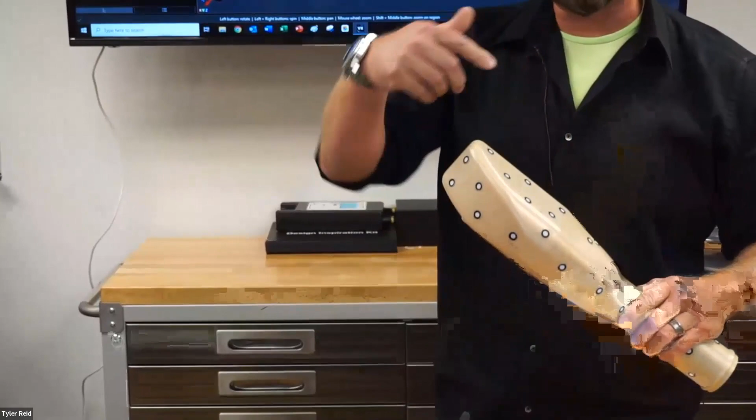I already have it plugged in, and I've already run a quick calibration. So let me show you a little bit about the scanning process. First of all, because this scanner is not hard mounted with an XYZ axis, it needs to know where it is in space. And that's done by putting targets on the part that you're going to 3D scan. So for instance, if my part is large enough, I might just put targets on the part. And that will allow me to scan the part.

And as you can see, the part can move. The part does not have to stay static, does not have to be hard mounted, because everything is moving together. So it can be a really great option for scanning things out in the field, scanning larger items that you can't get back to a clean room and hard mount. Now, let's say I'm going to scan something that is smaller and I want to do something more precise.

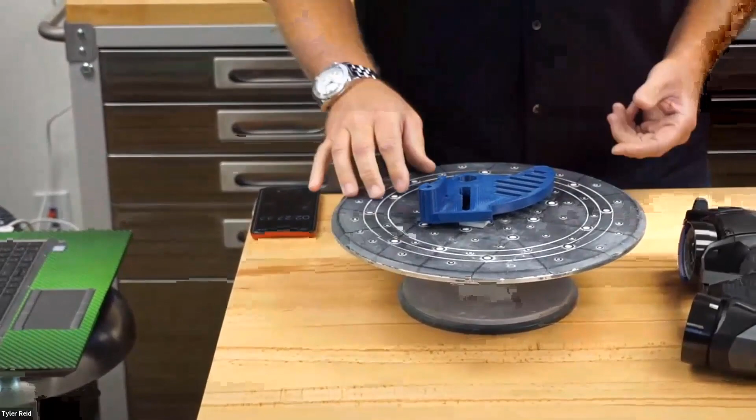What I have here is a turntable that's already pre-targeted. I have a little, we call it a shark fin. It's actually a disc brake guard for a motorcycle. I'm just going to set it here, and I've got targets in the background. I'm going to do the same thing.

I go to scan, and as I'm scanning, you can see on the screen behind me, or maybe live on the part, there's actually an 11 laser cross-section that's going over the part, and every time those lasers go over the part, the cameras see that. It's able to pick up that data very quickly, very precisely.

Now, I've got a lot of extra stuff in the scan that I don't necessarily need. Well, we have the ability to do things like add a clipping plane. So I can come in very quickly, select a few targets here on my screen, and it immediately gives me a plane that I can select and say, okay, yeah, let's delete that. So now all of that background data is deleted.

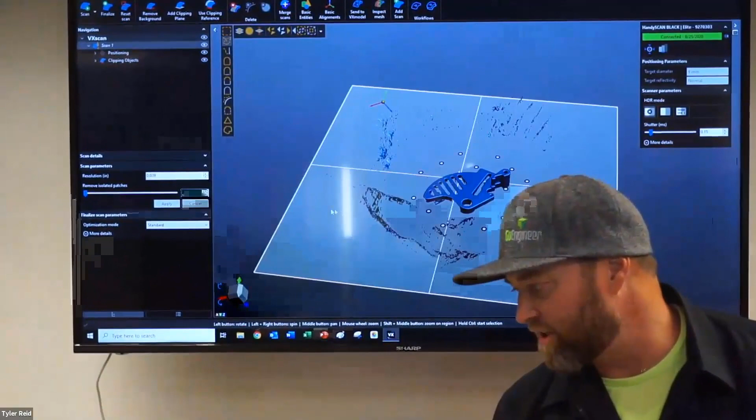I also have the ability to do things like grab the geometry of my part, and then quickly select everything else in the scan and delete that very quickly, which leaves me with just a clean version of my part.

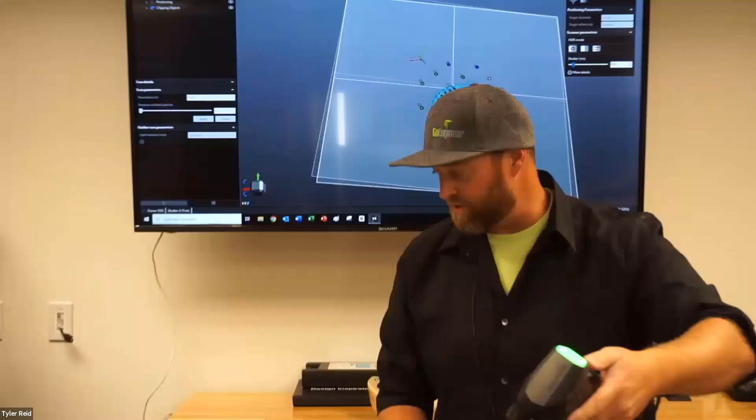If I want to go back to scan mode now and rescan and get a little bit more data, I can absolutely do that. I can zoom in right here from the handheld to get a little closer up and show detail. I can also switch to a single laser mode, which allows me to focus in on specific areas and get really precise detail down in a hole, down in a cavity, something like that. The single laser mode has a little bit better point of view.

Now, you might be asking, well, what about on the small part? How would I get the other side? Well, once I have the data I want from this side of the scan, I'm simply going to flip the part over. I'll come in here to my software and just tell it to add a scan.

And I don't know if you can see it on the screen, but over here I have a little bit of a feature tree. I have my scan 1, and now it's just added scan number 2. And all of the same features came over. So I'm just going to turn off scan 1 so it's not in my way. It's already given me that clipping plane, the targets, everything's right there. So I'm just going to go ahead and hit scan.

Oh, started on the single laser mode. And there it is, starting to scan the second part of the part. I'm going to work myself around it. I like to compare it to a paint gun. If you haven't painted that side of the part, you don't have data there yet. But as soon as you go over that, you're going to have data.

It's going to be nice, crisp, clean, and I probably didn't mention it, but this scanner on a part like this will hold just about a half thou accuracy. So it's very accurate. Once I have all the data I want, I'm going to go ahead and stop that scan. Then I'll come up here in the software, and I can clean it up now, or I can leave it the way it is.

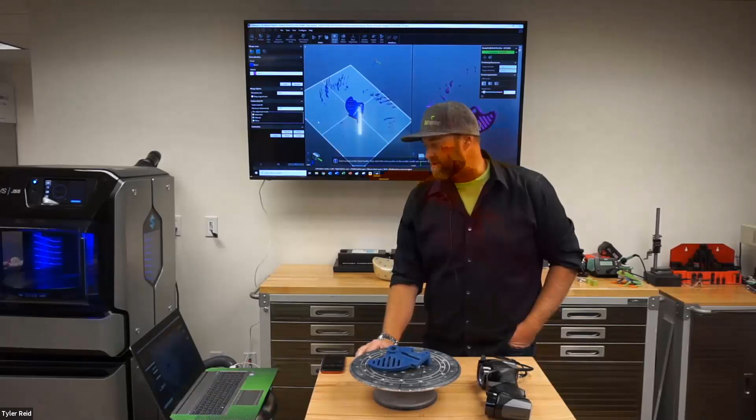I'm going to come over here to merge scans, which is going to give me a screen where I can either try to automatically put them together or put them on a split screen like this, where I can get them into the same attitude, pick common points between them, and then just mesh those two together. So this way, I'm getting a complete scan of the part all the way around on a smaller part.

As you remember, on this larger one that I showed at first, if I can target the part, well, I can either have that sitting down, flip it, as soon as it sees the targets, it scans all the way around. So you have a lot of freedom in using the targets. You're not confined to a mounted location. And you can get a lot of great scan data really quickly.

Now, after I go through this process, on some parts it might take 2 scans, maybe 3 scans, maybe even a 4th scan. You can go ahead and do that. But what you want to remember is that once you put those together, you're going to get a complete scan that you're going to export over to your next part of the process.

Now, I mentioned I was going to turn that over to William. So I believe William has actually this same part queued up, and that's where we're going to be moving here in just a minute. So to finish up this part of the scan, all I would do is finish putting this together, go up here to the file, go right to export, kick that out as an STL, which would be a mesh model, and then we would move that downstream to one of our 3D scanning softwares.

Now, I get asked all the time, can I throw that scan straight in SolidWorks? The quick answer to that is no. SolidWorks does not like to work with 3D scan models. And you might say, oh, well, I have all these mesh tools. Yes, you do, but chances are the type of mesh that's going to be put out by a modern 3D scanner will not be able to open there in SolidWorks with anything other than just like a 3D image. You probably won't be able to select it, create anything. And so you really need a 3D scanning software to bridge that gap.

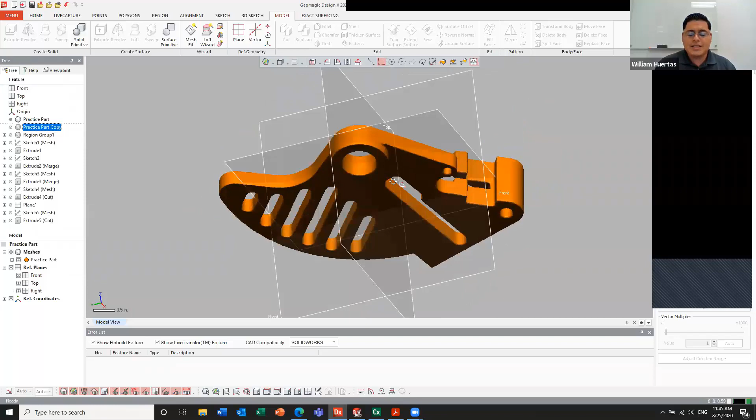One of the first things you'll notice about scan files from pretty much any 3D scanning software is that the origin, depending on where you have this scan completed, for example, Tyler put targets on a table or on a wall, usually the origin of the scan is out in space. So I'm going to turn on my front, top, and right plane just to show you that this scan is in fact kind of floating out in space, which is not a big deal because in Design X, we can actually align that very, very easily. In fact, Design X has some very unique tools that help you do that very quick. So I'm going to hide those planes just for a second.

And this software has something called regions. So in other software, you may have to manually create a lot of planes, cylinders, cones, things of that nature to help you do this kind of operation. Geomagic Design X has something called regions, and they're called region groups. So I'm going to use my Smart Select tool and show you exactly what it does. So using the Smart Select tool, I can click on a triangle and move my mouse up or down, and the software will grab similar points or triangles that have a similar normal, and I'm able to actually create a region group. So I'll go back to my Home tab here, and I'll say Insert a Region.

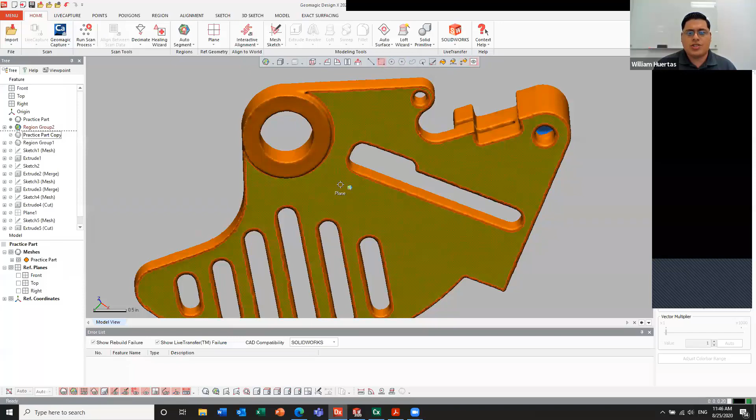So it'll change color on the mesh, and I'm just going to hover over it just to show you. The software has now classified that region group as a plane. So I can use that to help me align the part. Now, I need 3 entities. The reason I need 3 is I want to align all 3 degrees of freedom to the origin. So I just need 3.

I can have more if I want to, but 3 is enough because there's 3 degrees of freedom to align this to the origin. And it's very important that I do this first before any reverse engineering, any sketches, any extrusions, because I'm going to transfer this to Solidworks. So I need to make sure that this is on the origin, so when I transfer it to Solidworks, I can continue to work with it from that same origin.

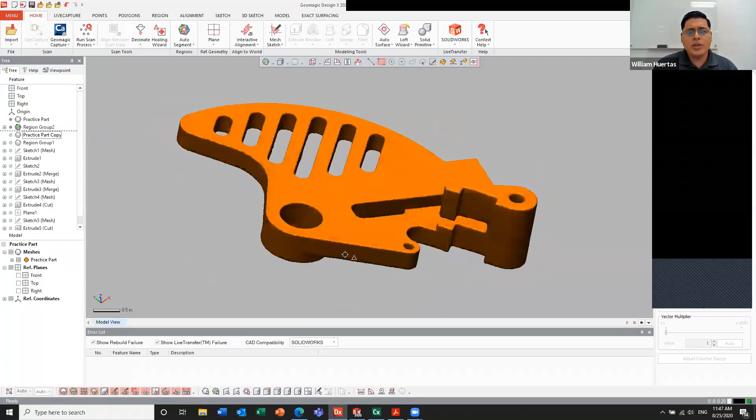So I got that region there. I want my second region here to be a cylinder. So I'm going to use my Smart Select tool once again, and I'm going to click on Insert. And if I hover over that area, you'll see that that's a cylinder. So the software is classifying these areas as specific geometric entities, right?

So I'm going to go ahead and make my last one. I'll make this area a plane region. And it's very quick, it's very easy. If I hover over it, you'll see that that's also a plane. So that's literally all I need to align this part to the origin. There's this tool called Interactive Alignment. I'll hit the next stage.

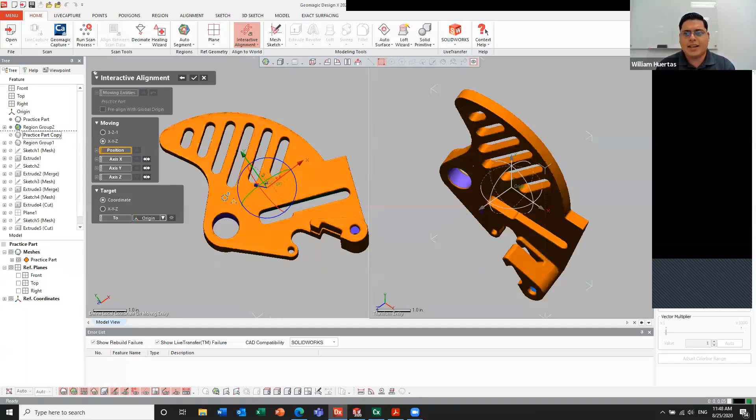And this is very, very cool because on the left side, I have just my standard view, and on the right side of the screen here, I have a preview. So while I start selecting stuff, I can actually see what I'm doing and get a preview of my alignment. So for the origin, I'd like that to be the position. I'm going to click on that planar region and also that cylindrical region and tell the software the intersection of those 2 entities should be the origin.

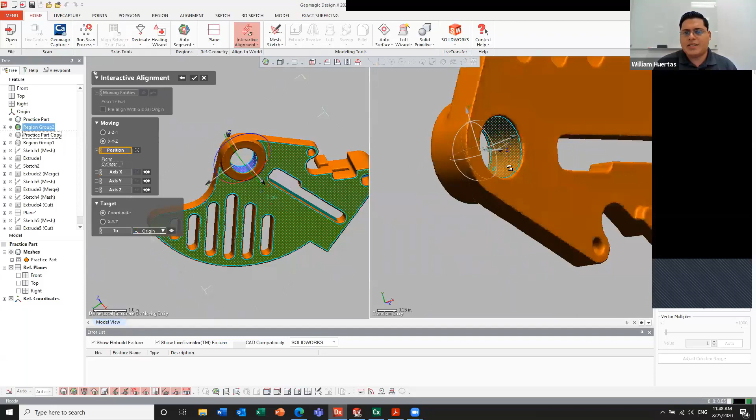And if I look at the right side, you'll see that, it's not perfectly aligned yet, but the origin is kind of where I want it. So my z-axis will be that same bottom plane. And finally, I'll select my y-axis to be that last plane region that I have. And you get this preview here, and the origin is not quite where I want it because I can switch my normal for these planes.

And finally, this looks the way I want, and I can always double check by using my standard views like front view. I can click on right view or top view, and that looks exactly how I want. It's a very simple, very quick way to do that. And once I'm done, I just go ahead and accept that.

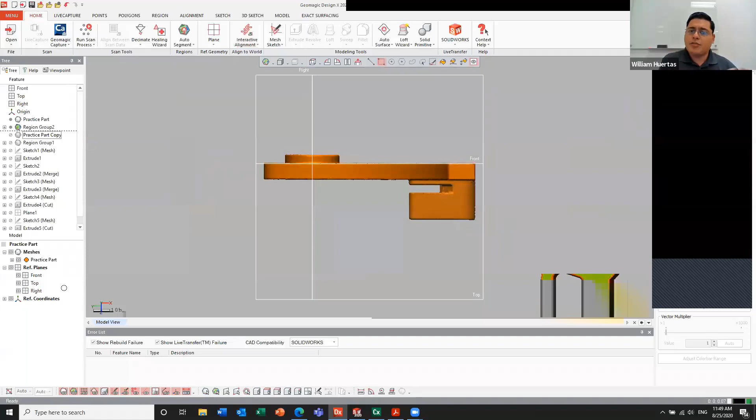And if I turn on my standard planes, the software actually moved the scan to where I wanted it, right at the origin. So if you look here, the origin is exactly where I want it inside of that cylinder. And obviously using the other 2 entities as a guide, this is exactly where I want it. So from here, I can just start doing my standard reverse engineering practices and get this thing fully reverse engineered.

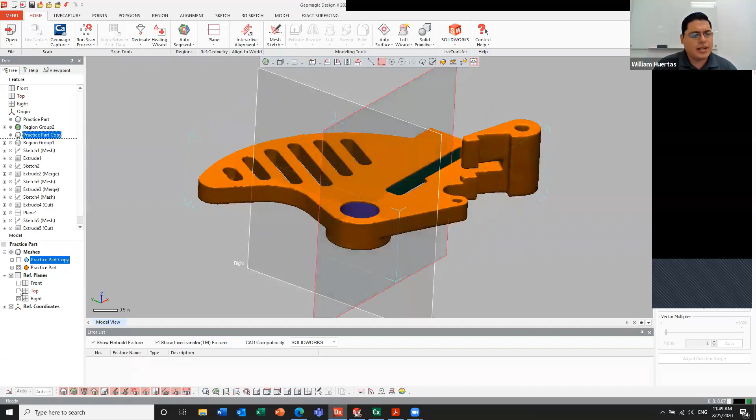So the first step is I usually make a copy. You can see here on my feature tree, I made a copy of the mesh. Usually I do that just in case I do something to the mesh. Maybe I filled in a hole I didn't want to. I always want to be able to refer back to the original scan, so I always make a copy of it. So I'll hide the planes for a second. I don't need to see them right now.

And one of the cool things that you can do apart from making copies of the mesh is making separate region groups. So one thing I did with the copy of the mesh is I made separate region groups because I'm going to need to know when I make the extrusions how far to extrude, right? Like how high in terms of a dimension.

So I could measure stuff manually, or you're going to see in a second how easy it is to use DesignX to actually just go up to the region and get the exact value that you want for your extrusion. So that's why you see the green, the orange. I just made a separate region group for those areas. So it's very simple from here.

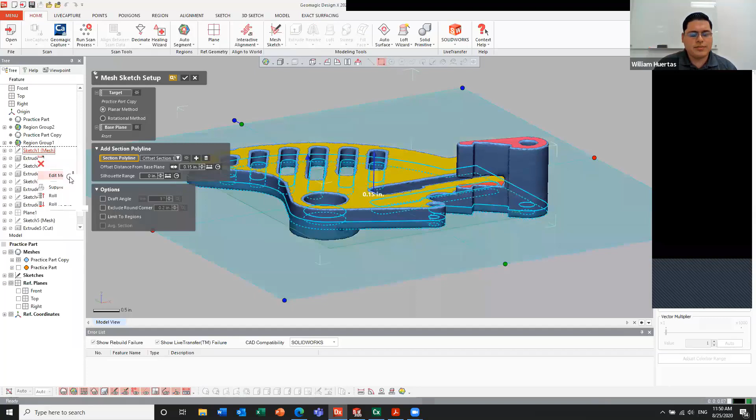The first thing you want to do is start creating your sketches. In this software, they're called mesh sketches, but it's just a cross section. Let me show you how that works. Essentially, you pick a plane, a base plane. In this instance, it'll be the bottom of the part, which I align to the front plane. So I use the front plane as my base, and I can grab that. And I have this little arrow here where I can tell the software to intersect the part, and you see a blue preview here. So wherever you see the blue line, that's what the software is going to give you in terms of a cross section.

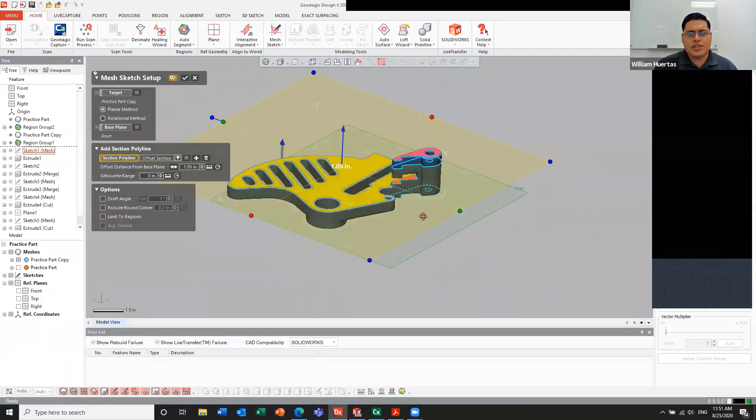And the really cool thing about DesignX is, I'm going to zoom in so you can see, no matter what height I have that cross section at, it'll project. That's why you see the dotted blue lines here at the bottom. It'll project it to my base plane. So that makes things very quick for you to just start making your sketches and your extrusions no matter how high. Because there's some other software where, for example, right now I'm at 1 inch high, it'll actually make your cross section at 1 inch. So you'd have to project that later on in the process, whereas here in DesignX, it's just that much faster. It already projects it for you, and you're ready to go. So I'll hit the X on that.

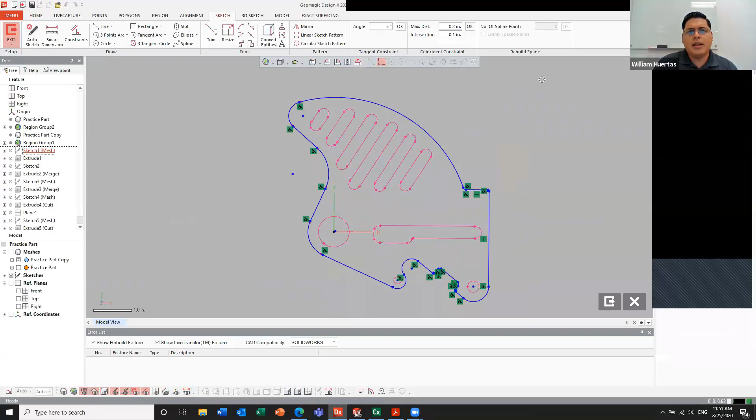Let me show you what a sketch looks like. So my first sketch is completed, but I want to show you something. This pink line sketch is my cross-section. They call it a polyline sketch. And really all it is is a composition of geometry from the mesh. So it's not perfect. Circles don't look perfectly circular. Lines don't look perfectly linear because it's from the mesh, right? So it's your job to manually go in here and trace over it. In other software, that's a very long process.

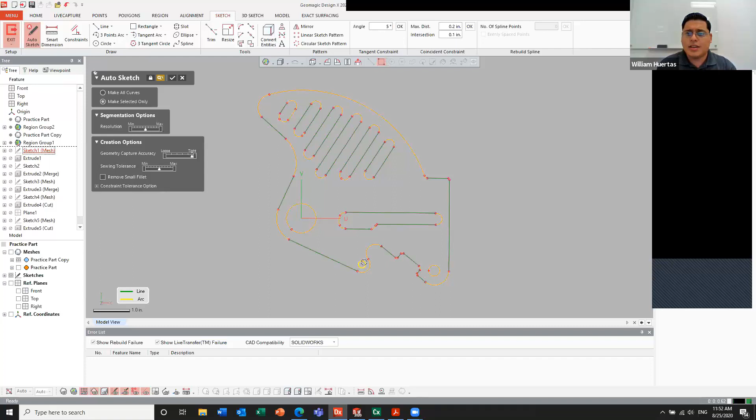Geomagic DesignX has this very unique tool called Auto Sketch. You might think that a sketch like this might take somebody maybe 15, 20 minutes, maybe more. I usually ask my students how long it'd take them to sketch something like this, and they usually say about 20 to 30 minutes, and that sounds about right. Well, using the Auto Sketch tool, which is only available in DesignX, I can literally just hover over this entire sketch, and you see all the blue lines, and in a second, I have all of those entities already drawn there for me. Apart from that, it also added sketch relations. So you SolidWorks users might see tangency, perpendicular, vertical, horizontal. All those sketch relations got added for me automatically.

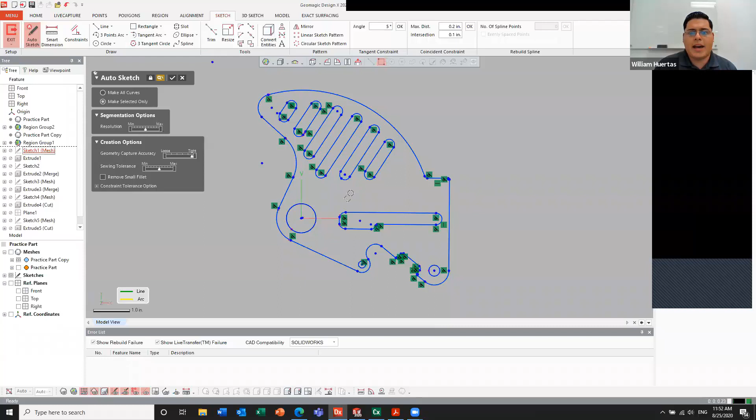Now, it's not 100% perfect. You still might have to go in there and change some of this, but it's just so much faster than doing this manually with other reverse engineering software. And there's also a resolution grab bar here that I can grab if I want less tangency or more tangency, and you'll see the preview change a little bit. But that's completely up to you. You can go in there and change stuff. You can even remove small fillets if you want to. It's a very, very easy thing to do.

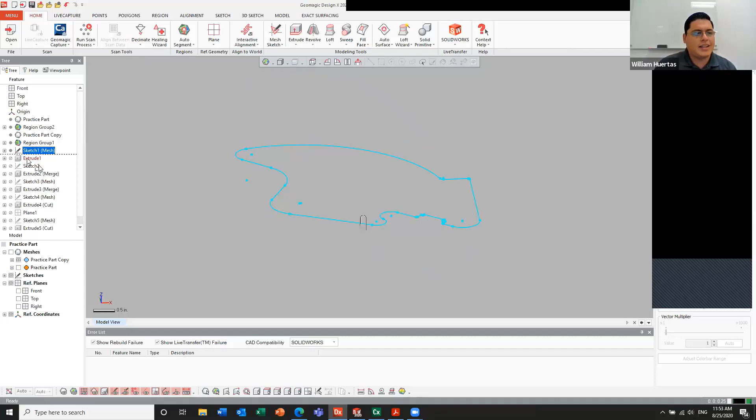And I actually didn't have the entire sketch drawn. You'll see in a second. I just have the outer profile because I always teach my students extrusions go first, then cuts. I teach SolidWorks, and that's one of the main things that I always repeat every day to them: extrusions go first, then cuts. And if you follow that rule, your designs will be a lot easier to modify. So once I have that sketch, I can extrude that, and I have my very first parametric feature. So this is no longer a mesh, 100% parametric data.

So from here, I can just go ahead and start the same process. From here, it's repetitive. I get another cross section, and I make another extrusion. So there's my other one, and then I have one at the top, right?

So I use the same exact method that I've been doing, and I grab another cross section for that top area, and I do another extrusion. Now, you might be wondering, well, hey, William, how do you get those extrusions? Like, how do you know how high to go? Well, it's a very simple tool.

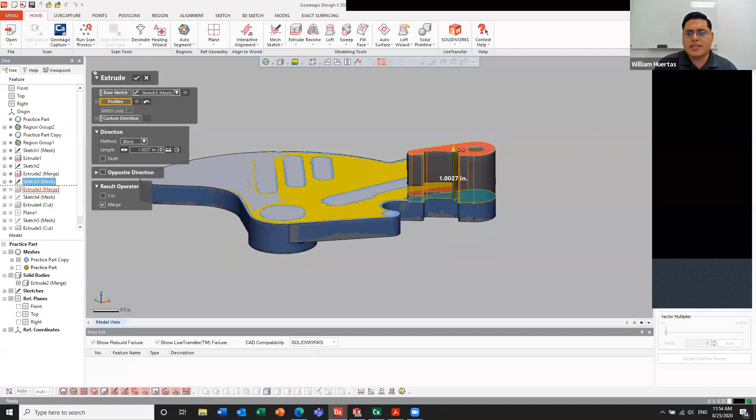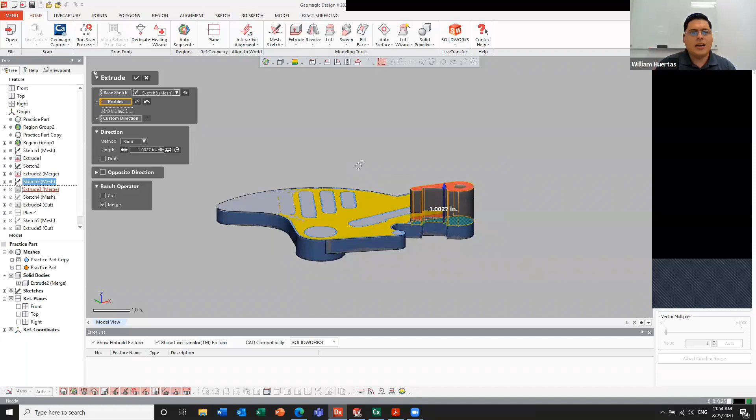When you use the extrusion tool, and I turn on the mesh, it's very cool because I can actually snap, and you can see when I'm grabbing my extrusion, I just get close to the region and it snaps. So I zoomed in so you guys could see that the boundary of that region lights up and you can snap to it. So it's a very easy thing, and regions help you do that so much faster than having to go in there and manually measure this stuff. So it's very, very easy.

That's a very unique tool to DesignX, the regions, and that's what allows me to get all of these extrusions. And then the very last thing was I needed to create a couple cuts. So I got a cross section for all the inside cuts, and just like in SolidWorks, I do a nice extrude cut through both directions, and that's done except for this slot cut here. Now for that particular area, I really just needed the information for this inside slant area.

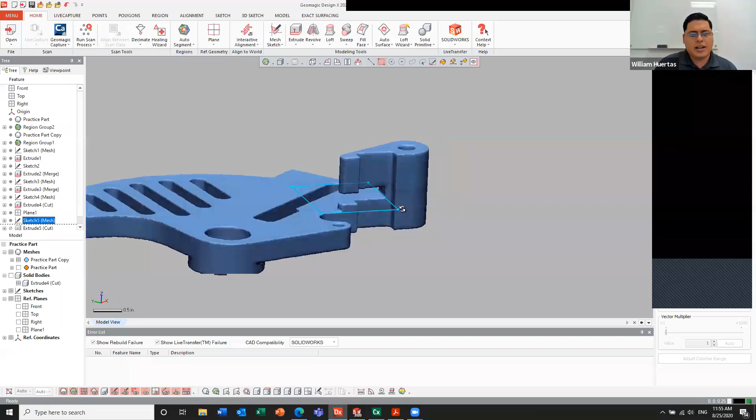So I got a cross section for that. And I just used a little box using the same method. I just went up to the other region. In fact, if I rotate the part, you'll see that I have another planar region where I could do the same method I was doing earlier. Okay, so the last thing I want to do is do that cut. And if you look here, I have the last cut done. Exit this sketch.

And finally, I can show you my completed, fully reverse engineered part. So this part here is 100% done. Now, this is where things change. Usually, other software can get you to this point. You have just a solid body that you can import into SolidWorks. Now, that particular solid body may not have the actual feature tree and all of the features involved with it.

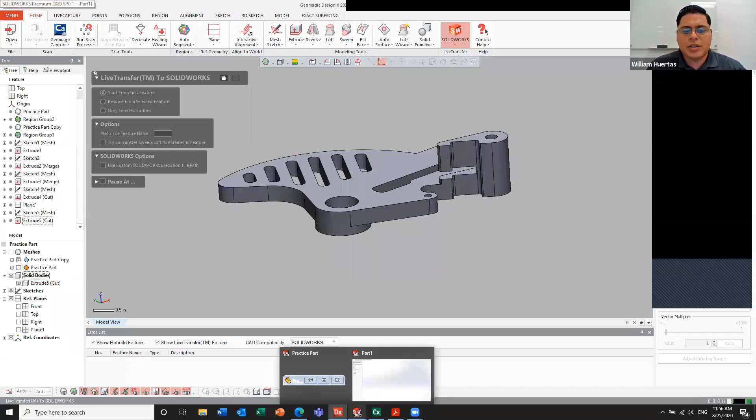So Design X has a very unique feature called LiveTransfer. It's actually very easy to use. You just click on the LiveTransfer tool here, and all of the feature tree, including my sketches, my extrusions, all of that will get transferred into SolidWorks, kind of like a movie. If I turn it on in a second, you'll see. So I'll click the check mark here, and I can switch over to SolidWorks, and kind of like a movie, you'll see all of my sketches, my planes, my extrusions, my cuts, all of that gets brought in very slowly.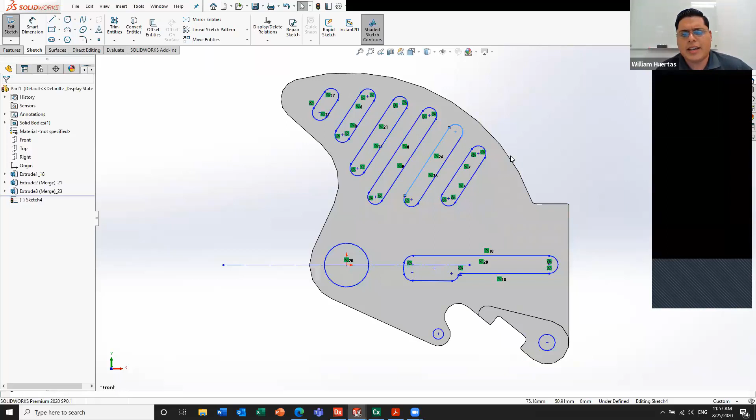And it'll take about a minute or so to get all of that in there, but you can see that I have parallelism, tangency, any other sketch relations that I have get transferred with it. I'll hit OK. I'll hide the planes there, and 100% everything that I did in DesignX has now been transferred into SolidWorks. And this makes the tool very unique because there's no other software that can really do it to this level.

And obviously the biggest reason to have this inside of SolidWorks is you can just point to any of these sketches. And just like if you had done this in SolidWorks to begin with, you can right click, edit a sketch, and add dimensions, or at this point, the sky's the limit. You can make drawings, you can use this part as part of an assembly, so on and so forth. So at this point, it's pretty much 100% done, and you have all of the data that you had from DesignX inside of SolidWorks.

Okay. So the next thing I'm going to do is transfer to ControlX. What I'm going to do is show you how to inspect. So this is a scan to inspection software. And what this software does, actually, give me 1 second.

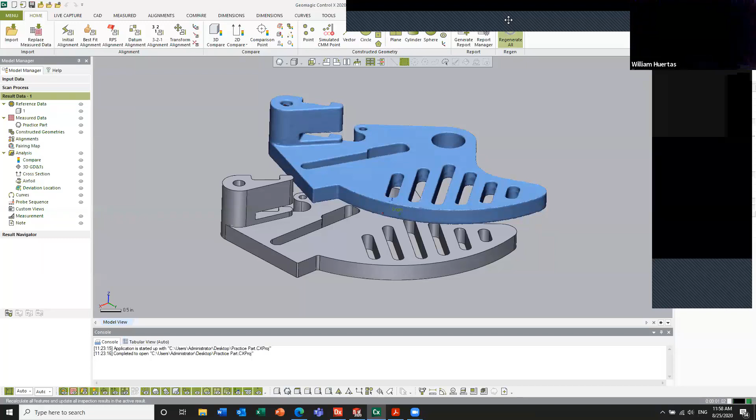Okay, sorry about that. So this is Geomagic ControlX. It's the brother software of Geomagic DesignX. And the whole purpose of this software is to basically get a scan file and inspect it to an original CAD. In fact, you can actually inspect scan data to other scan data or another mesh.

So you don't actually need a solid body to run an inspection on a scan file. But for this particular case, I did actually have a solid body. So I want to show you the process of inspecting a part to CAD using the model that I had from SolidWorks. So yeah, this is a very, very simple software.

You might be wondering, when would I want to use this? Well, there's a variety of reasons you'd want to use a scan to inspection software. For example, if there's a part on a CNC machine that you want to inspect a curve, and you don't want to take it out of the CNC machine, you can actually use that scanner that Cameron was showing earlier, the HandyScan Black Elite, and do what we call in-process inspection, where you can actually scan that surface and bring it into here, and you already have the CAD model, right?

So you can do a very, very quick inspection on that surface if you notice that something was wrong with it, maybe. You can get a color map for it and check it really fast. So there's a variety of different reasons. For this particular case, let's say this was a first article. Let's say I'm going to remanufacture this brake guard, right? And a company sent me the first article, and I scanned it to take a look at it.

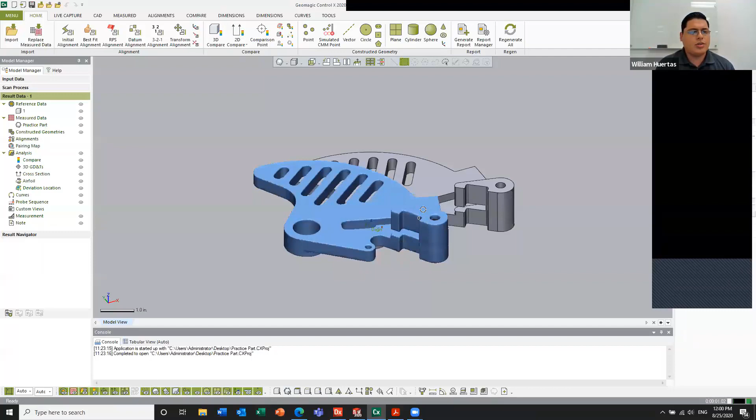Using this type of scan to inspection is very, very quick compared to using manual calipers, so on and so forth. And it brings to the table a lot of those tools that you might see in other software here, and it's a lot easier and quicker to use. So without further ado, I just want to show you how to do a quick inspection here.

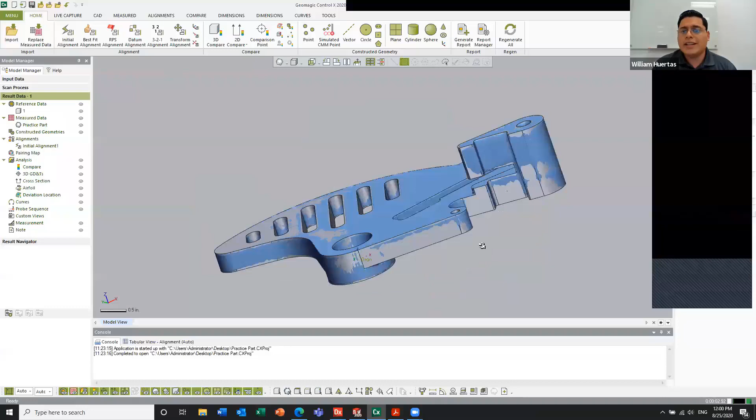So like before, the scan file is actually floating in space. There's my CAD model, which is aligned to the origin. I'm going to do my initial alignment. It's very quick, I don't want to say rough because it's actually not a rough alignment. With the initial alignment, it got really, really close, but it's just to get the scan file close to the model.

There's a bunch of different ways to align to the CAD model, but if you want to get something tighter and more accurate, you can use a best fit, and you can even specify how much of the data you want to use. I'll just go ahead and use 25%, and you can see that that's now fully aligned to the CAD model. So this makes things easy to start doing my inspection.

So one of the first things that people do when they're doing this kind of scan to inspection process is create what people call a color map. Some people call it a heat map, a deviation map. It's just there to show you the deviation between the scan file and the CAD model. So I'm going to go ahead and show you really quick. I can click on the tool, 3D compare, and I can do this for the shape or the thickness. It's pretty cool. And I'll hit the next stage, and you get a preview of it.

So you can see here, you can set your tolerance for the bar and for your actual tolerance of the model. You can set that and you get a nice color map. And it's very cool. You can add whiskers if you want to, add separation, so you can show the contour lines of where deviations exist in the part. There's a lot of different things you can do with this tool.

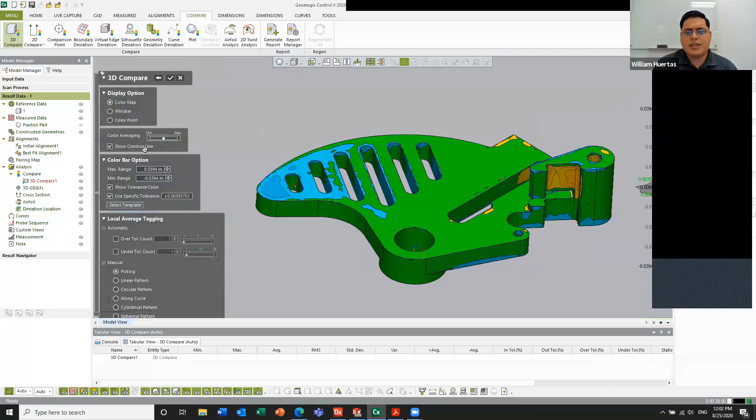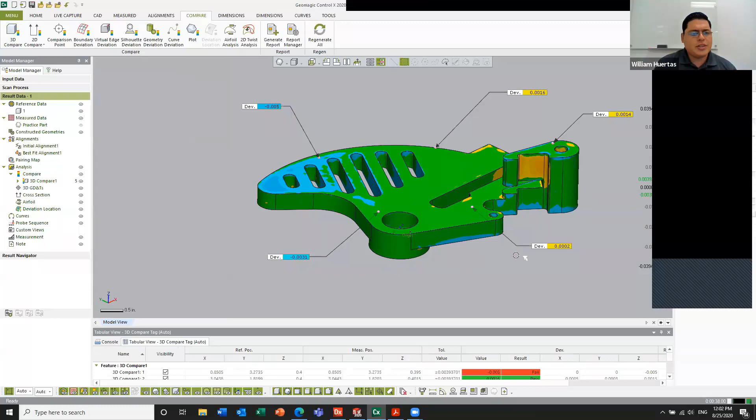Very, very interesting. If you're interested in specific areas, you can create what we call comparison tags. Essentially, you can just come in here and add a few of these points if there's specific locations that you want to check, and those will be color-coded and show deviation as well. So you can do a 3D compare. You can also do that in 2D if you wanted to.

I can click on the 2D compare tool, and it creates sort of a, it's not really a cross-section, it's checking the profile of a part. So I can come in here around 1.6 and tell the software I want to look at that profile. And there it is, the profile in 2D, and same thing, I can just go in here and make some comparison points, just like before.

And if I'm interested in specific locations, okay. And yeah, so I can do 3D compares, 2D compares, and I can hide and show anything I want to here on the feature tree. So anything that you do in this whole inspection process is recorded.

All right. So those are just the 3D kind of comparison, color map type of things. But one thing that everybody wants to see is, how do I make dimensions, right? Like, how do I bring in my GD&T, my parallelism, perpendicularity, flatness, so on and so forth, right? So first of all, if you wanted to do that kind of stuff, you'd need datums. So I can create groups of dimensions. So the first thing I'll do is specify what my datums are.

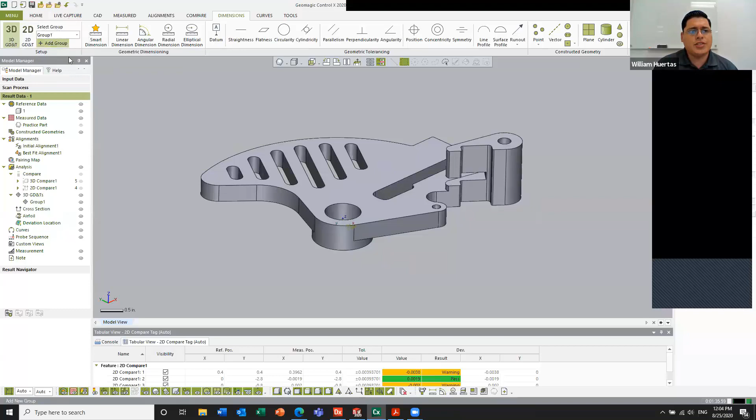So I can say this bottom area here is datum A, the cylinder here, datum B, and then that plane there, datum C. And I just created a group there. I can rename it if I want to. I'm not going to right now. I can add a second group, and if I want to make dimensions, usually the way I do it is I'll go to like front, top, right view, and do my dimensions that way.

So I can make linear dimensions. For example, if I want to get a linear dimension from the center of those cylinders, or circles, I should say. If I want to get from line to line, plane to plane, that's how I make these dimensions. Now, what I just did is very quick and very easy. So in other software, I'd have to make 4 different planes or 4 different reference geometry to be able to do these dimensions.

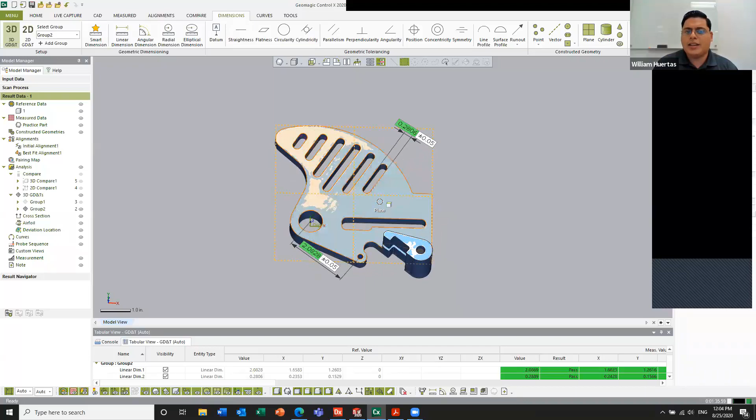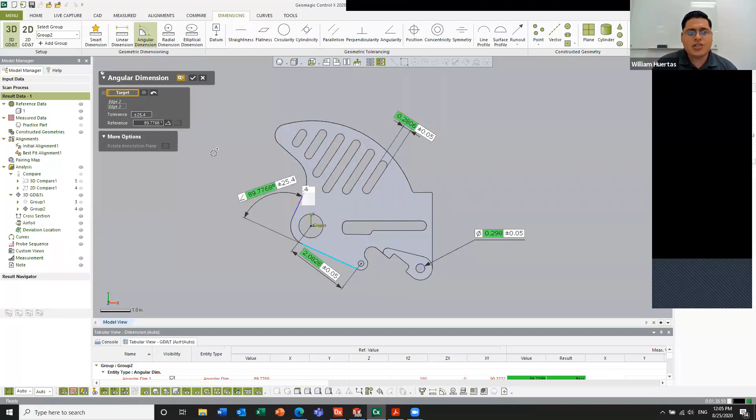So even though it looks like I'm only doing one thing, if I turn on the mesh, the software is actually creating 2 dimensions and showing you all in real time what the deviation is for those dimensions. It's not just creating it on the CAD, it's actually inspecting it automatically while you do this. Just click, click, very easy. So I can do a radial dimension, I can do an angular dimension, and like I said, it's creating it on the CAD and also on the mesh automatically. So, okay. So that's that.

I can create another group for like callouts. So for example, if I want to do flatness. So flatness doesn't require any datum. So I can say I want to measure the flatness of that top face. I can do that. If I want to actually specify datum, like say I want to do a true position, right? Let's say I want to do the true position of this cylinder here, okay? I can tell the software I want it to be in relation to A, B, and C datums. So I can do that, and the software will give me...

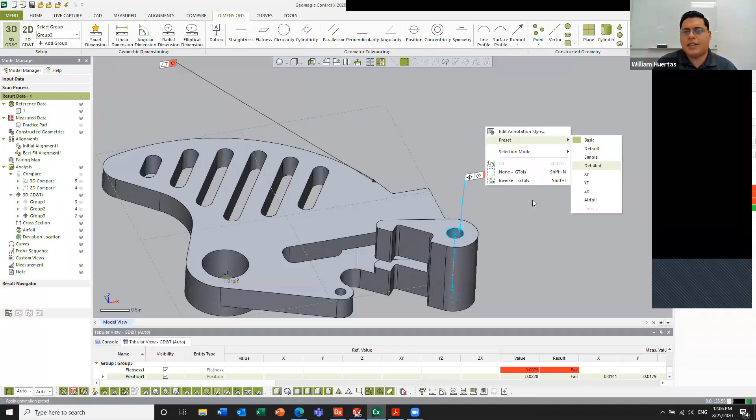Which by the way, I can modify those annotations any way I want. Right now they're on a simple mode, but I can change my preset to like a detailed, and it'll show the value, the measured value, the tolerance. I'm gonna leave it as just simple right now, but I can change all of that if I want to.

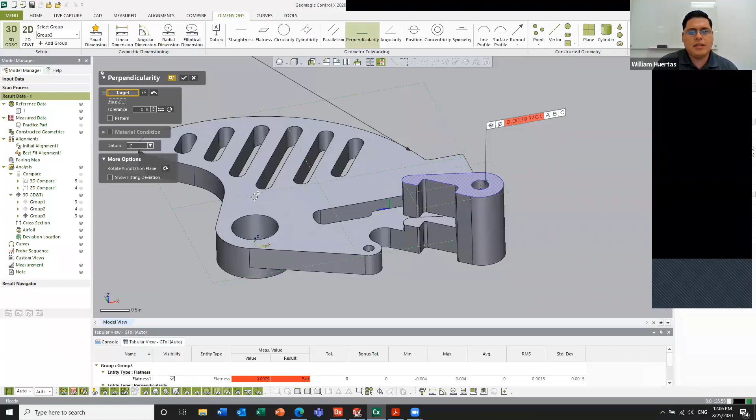For example, let's say I want to check out perpendicularity of this top face here in comparison to my datum C. So the software will go ahead and measure that for me and give me the values there for it. So it's a very, very quick, very easy tool to use. And yeah, you would go ahead and add your dimensions.

And the very last step is to go ahead and create a report. So that's very quick and very easy. You just click on Generate Report. And you can go ahead and type in your values. The whole inspection report that I was talking about, it's all there. And it's, you know, kind of in the same order that you did it. But you can kind of move things around. You can put in your name so that the report has your name, the part number, the inspector number, whatever it is.

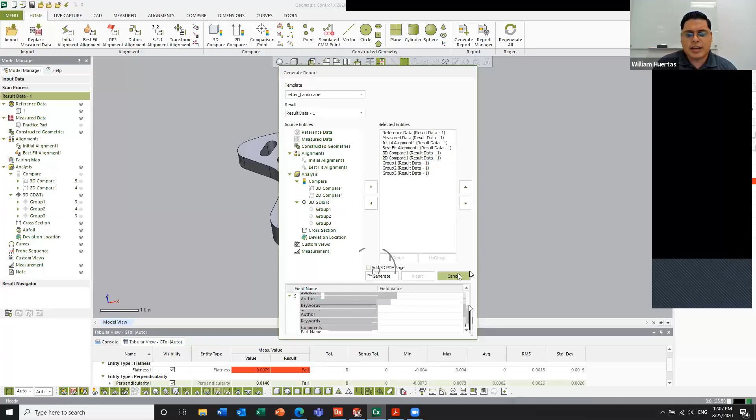You can type in that information here before you even make the report. And you can also add or remove anything you don't want. You can modify this and even add a 3D PDF page if you wanted to. So after you generate that, you get a report. You can have your company logo on there, name, and it'll show everything that you did.

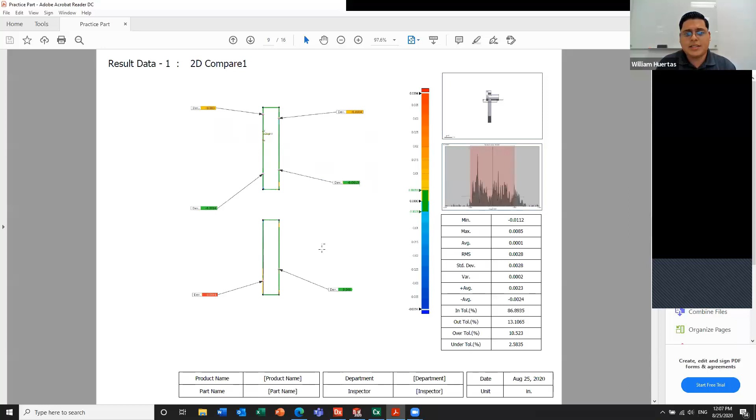There's my initial alignment, my 3D compare, and everything is listed for you, all organized, and even color coded. So all of the dimensions and the points that I took, they're all listed there for me. There's my 2D compare that I did. There it is. Those are the points compared to that, and you get values in relation to that.

They're also color coded. My datums, I have a page there specifying what those are. And finally, I have my front view dimensions that I did earlier. You can see that they're shown, and then they're also listed here, showing if they pass or fail. By the way, you can change what you want the green to be, what you want the yellow to be, what you want the red to be. All of that is fully editable.

But the intention of this software is for it to be very fast and very quick for you to go in there and do these measurements, and GD&T as well. And that concludes our session with Geomagic Design X for reverse engineering and Geomagic Control X for scan to inspection.

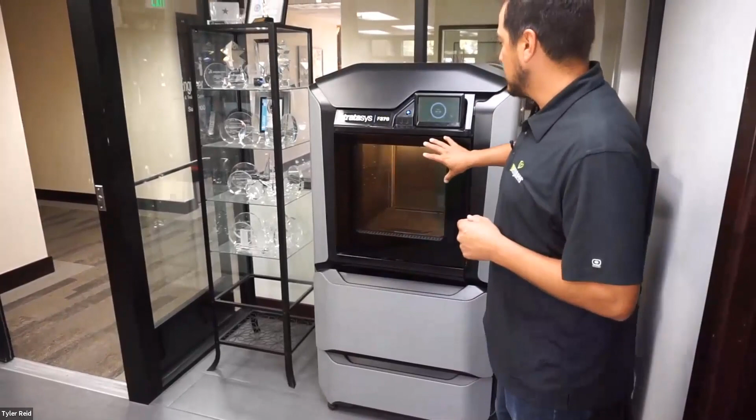It keeps the heat inside, but it also keeps the moisture out. Another thing we have is moisture sealed material bays, and I'll get into those a little later, but here are your 4 material bays. The other difference on the inside of this machine is we have closed loop servo motors. That's important because a lot of the industry uses an open loop stepper motor.

The difference between the two is that a stepper motor gets told to go from A to B, and it tries. Sometimes it gets there and sometimes it doesn't, and it doesn't really know. A closed loop system, like a servo motor, is told to go from A to B, and if it doesn't make it to B, it can do corrective positioning, so it can actually get to B even if it didn't on the first attempt. Servo motors also give us precision control, so you're going to have more precise parts, more reliable parts, and more repeatability.

The other thing about this design, one, it just looks good, but two, the designers put a lot of work into making it user serviceable. For the major components like heads, we don't have to have a technician come and service the machine anymore. You can actually access it yourself. In fact, I'll show you real quick if you can see that.

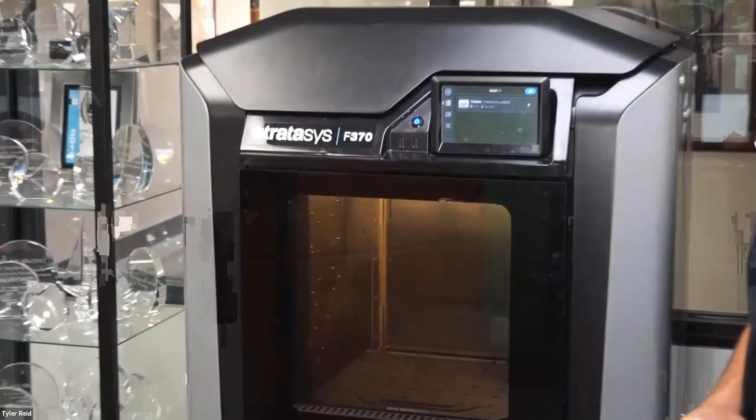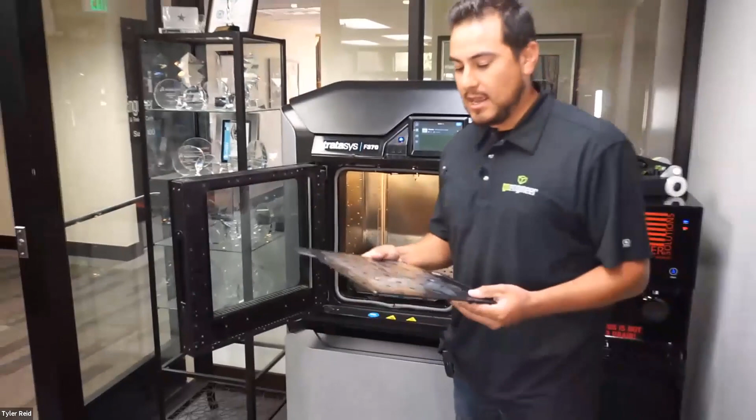But getting back to the inside, what makes this different is the ease of use. You can see we have this, again, in our office. So there are times when we have to call in and trust anybody to be able to come and change a job for us. With the touch screen and with how easy this system works, we can have anybody do this job.

And you can see this tray has a bunch of holes on it. And that's actually what helps keep our builds flat. You can see that we've used this. They are reusable build sheets. We can do multiple builds on there. And like stated before, it's very intuitive. It lets you know when it's engaged and ready to roll. So that's kind of the anatomy and the buildup of what makes this system different.

Now let me show you some of the features. So as I showed you before, we've got sealed material bays. So you have 2 for model material and 2 for support. We've got a little extra area here where we keep some gloves and some tools to clip filament.

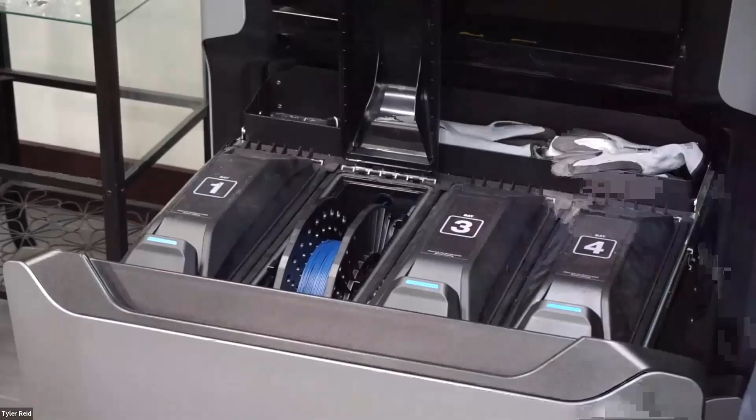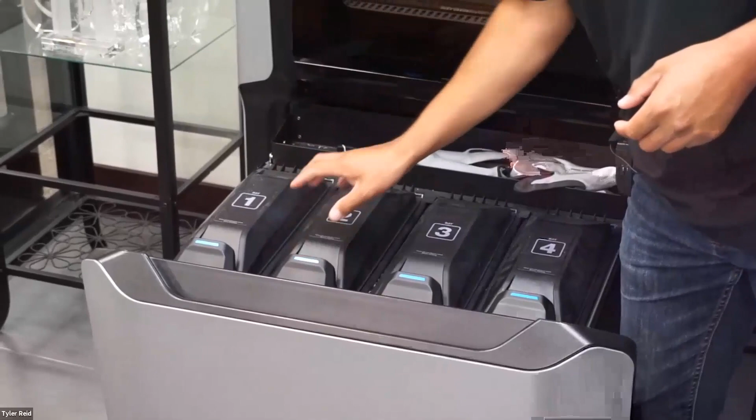But loading material in this machine is actually very simple, and I wish I would have left one of these out to show you. But you just feed the filament into this hole, and the machine will automatically load that material for you. Again, these materials can be hygroscopic, so they're going to try and pull moisture from the air, and we want to make sure it doesn't do that. So Stratasys has gone to great lengths to make sure this is a good sealed system.

You can see the build size. The build envelope's pretty large at 14 by 10 by 14. It's not the biggest on the market. There's prosumer level systems out there that are 2-3 times as big. The difference is going to be this heated build chamber. If you look at the build chambers on some of those systems, you can see that air is just leaking out everywhere. So they're not keeping moisture out and they're not keeping the heat in.

So from there, what makes this system special is having 2 different advanced slicer softwares. You get GrabCAD Print that's feature-based. It works a lot like SolidWorks or Creo, whatever you're used to modeling in. And then we have Insight, which is going to give you layer level control. And that's the same slicer that we use on our production level systems. So again, this bridges the gap between the 2.

So lastly, I just want to go into materials and some of the builds that we have on these. But the other great part about the F370 is it comes with 7 materials. You don't have to buy those packages like you do with some of the production level systems. So you get PC-ABS, ABS, ABS-ESD7, which is an electrostatic dissipative material, ASA, PLA, Diran, and TPU. So you get some flexible materials in there. This machine can help you do a lot of things with that material flexibility.

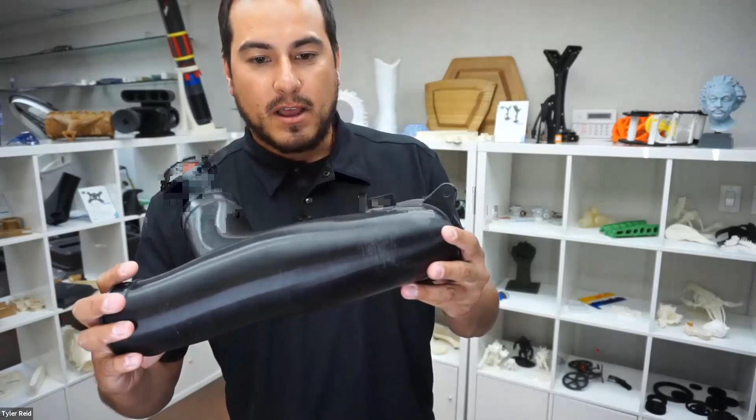One of the parts I really like to show off is this intake. And this is our flexible TPU material. And you can see the finish on that is just spectacular. Even where the support material touched, it's really good, but really flexible. And the Z-layer adhesion is just spectacular. So that's another cool part.

And these machines are really as powerful as you make them. So if you think about how it can help you hold on to components like this that are very organic shape. You can imagine trying to hold on to that if you had to do any post-process machining or anything like that. We can build fixtures that hold on to materials like that. It doesn't matter if it's an inspection fixture, a wear component on a machine that you have in-house, but really the sky's the limit. And you can see behind me a lot of the parts we have here are FDM parts.

So with that, I guess we'll get to questions and stuff afterwards, but right now I want to throw it to Cameron. Follow me.

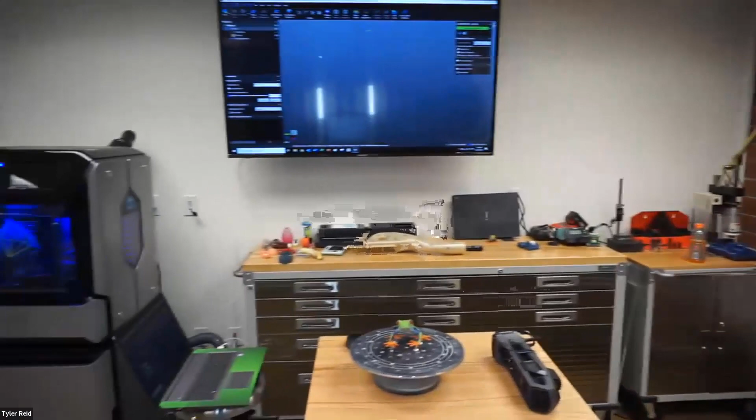Okay, earlier I was able to show you guys the HandyScan Black Elite, which is a very accurate handheld laser scanner. Now I'm going to show the GoScan Spark, which is a handheld light scanner, sometimes called SLS, Structured Light Scanner. This scanner, if you look at the front of it, you can see has the cameras, and then it has a place where the light comes out. The light will put a pixelated pattern of light over the part. As it's deformed, the cameras pick that up, and it's able to pick up the 3D scan.

Some of the benefits of having a light scanner over a laser scanner are it's able to pick up color and texture. It's also able to do other scans as well, and so there could be a lot of crossover between the laser scanner and the light scanner. But the laser scanners do not pick up color and texture. So if you do want to recreate an object and get the color and texture, you're definitely going to want to use a structured light scanner like the GoScan Spark.

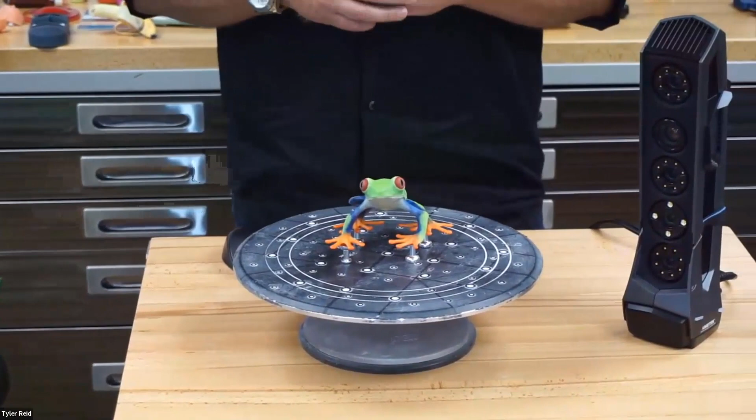What I have here in front of us is a little colored frog. And we're going to go ahead and 3D scan this frog. And then afterward, we're going to talk about how you might be able to then do a color 3D print of this. So you're going from, I have this part, I want to recreate it. Well, first let's scan it. Then we would maybe do some cleanup on it in the Geomagic tools that William already showed. Once you have that final STL file, you can send that right to a color 3D printer and get a color 3D print like this.

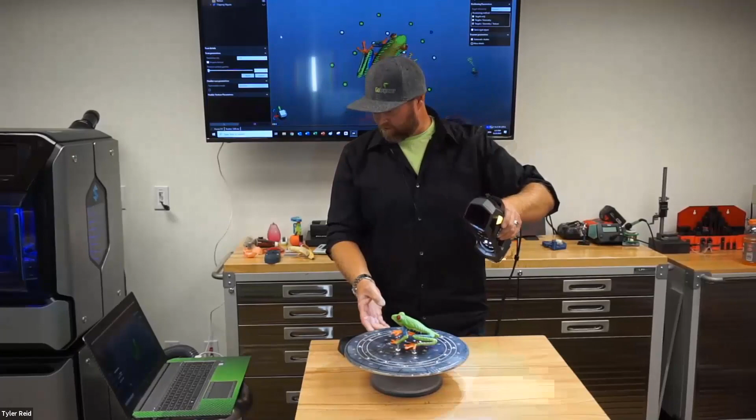So let's jump into the 3D scan. Again, I'm connected to my computer with a USB cable. Go ahead and start. And we'll go ahead and zoom again right here from the handheld. And as I work myself around this guy, I'm getting not only the scan data or maybe the engineering data, the size and shape, but I'm also getting a color map and a texture file. So three files being connected all at once.

Now, one thing you're going to want to watch when you're doing a scan like this is how much memory and how much RAM you have, because you can very quickly max those out, and if you do that, you can get a crash. So this is a big file that can be created. You can see I've got my hand in the scan there. Go ahead and stop this, and then we'll come over and clean it up a little bit. Select our scan, inverse that to grab everything else and delete it.

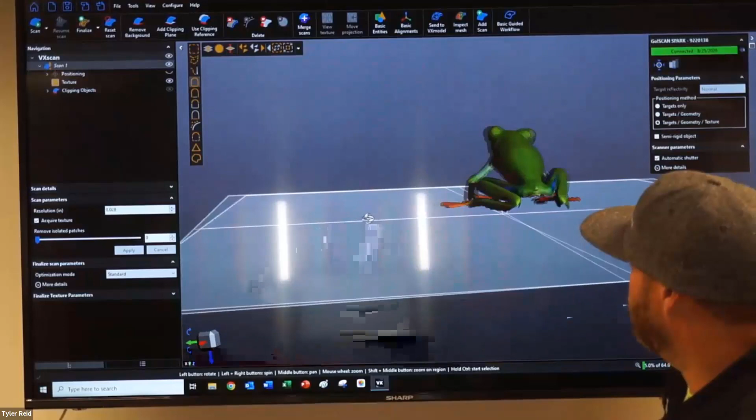Look up here at the screen. Turn off the plane that I set so we weren't getting the table, that was the texture. You can see I'm getting the color and shape of this part. Now, we'll go ahead and say, let's finalize that scan. Take just a second. And it's the same thing as before.

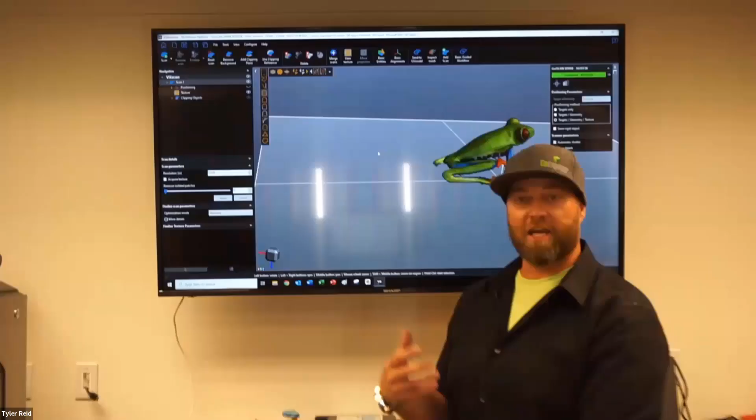If we look at the underside of it, we see we don't have any data on that part of the scan. So we'll do the exact same thing we did before when we were doing the scan with the HandyScan on the brake disc guard. We'll just come up and hit Add Scan, which will open up a second scan in our feature tree. And then we'll go ahead and flip the frog over.

Turn off our first scan so it's not in the way. And we'll scan in from this side. Now I don't have that clipping plane set up on this one. So again, what I can do is go ahead and set that plane up very quickly.

Or there's another tool that works really quickly as well, which is this remove background tool, which is going to say, okay, I think that's the background. And then it actually lets me drag that up. So I can drag that right up to right below the table very quickly. So yeah, let's go ahead and do that. And that will basically delete everything below there, giving me just my part.

We'll go in and scan him a little bit more and fill in the rest of that data. Now at this point, we're not capturing the table or any more of that extra data. Once we think we have everything we need, we'll go ahead and stop that. We'll clean that up real quickly again. Let me just delete that plane so that we can see him a little more clear.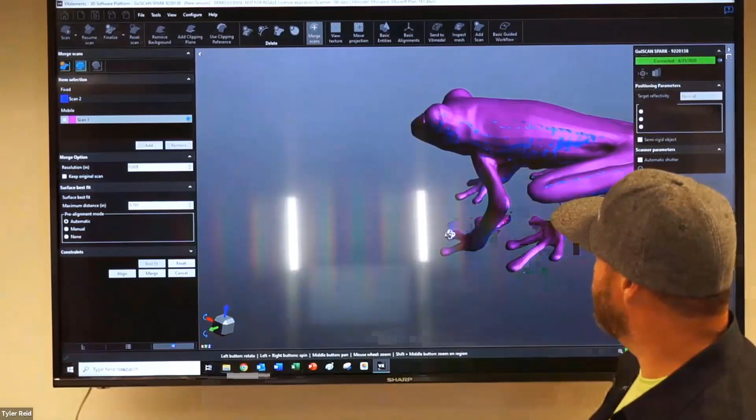It's exactly what we want to see, is those 2 kind of leading into each other. We'll go ahead and accept that and merge it. Turn off our first scan because our second one is the one we want to keep. We'll finalize that. And here you can see we have now a full color scan of this guy, top and bottom and all the way around.

Now again, if you feel you need to add a 3rd scan, you can go ahead and do that and add a 3rd scan, 4th scan, whatever it takes. But again, we've shown how you can get a full color 3D scan, also getting the size and shape, and create a color map and a texture file to do things like a full color 3D print.

The process from here is the same at this point. I'm going to go ahead and just go up to my file there and go export. This time it's going to default to an OBJ, which is still a mesh file that is able to accept that color and texture data. Now, let's go ahead and hand this over to Tyler Reid, who is going to talk to us a little bit about another one of our 3D printers.

All right. Thank you, Cameron. Even though I get to see that stuff every day, it's still magic to me. It's unbelievable how fast he was able to recreate the shape of that frog, but also the color data. That's nuts. Between those two scanners, the HandyScan Black Elite, recreating ultra high precision engineering data, and the Spark creating high precision, but with color data, that's nuts.

So I think I'm last up, and they say they always save the best for last. And this isn't a competition, but we follow that rule here.

So I'm gonna be talking about the J55 PolyJet printer. The J55 PolyJet printer is the newest generation of printer that uses this technology that is owned by Stratasys. I'm going to briefly talk a little bit about how the technology works, and then mostly I'm just going to jump into some show and tell. There's a reason why we brought this technology after the color scanning, which we'll talk about.

Your printer at home. You take a beautiful photo, you want to put it up on your wall, you load cyan, yellow, magenta inks into your 2D printer, you hit print, it creates it. Very easy, very simple. We all know how to load a printer, print a picture. This printer essentially does that, but it adds a third dimension, that 3D space. So we're able to load up this printer with a variety of resin materials.

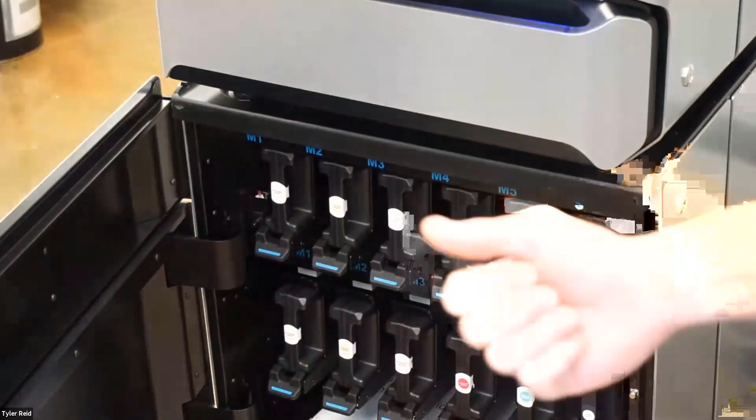Down here, you see 12 slots. Those slots right now are filled with a yellow, a cyan, a magenta, and a white material, and then one more material that we kind of pick and choose what we want. And in this case right now we have clear. So we have a full color spectrum plus a clear material.

Just like your 2D printer, we can mix these on the fly. As we're laying them down, we hit them with UV light that cures the resin and creates a solid part. So your 2D printer at home, you load up 3 materials and it can create millions of colors. Similar to this scenario here, we load up some base resins, we can create hundreds of thousands of unique colors.

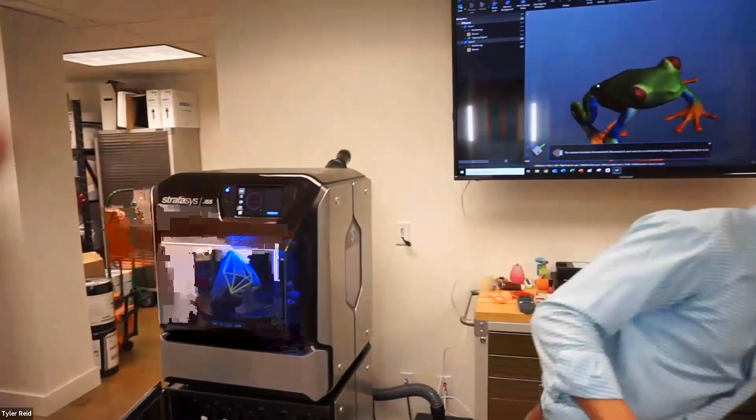The OBJ file that came out of Cameron's scan gets loaded up into our software straight away. OBJ file, 3MF file, VRML file, and we can print. In fact, this frog that we scanned was printed. That's a 3D print. So this is printed in matte finish. We also have what's called a gloss finish, which gives you that very glossy texture. Now, it's easy. We have a lot of flexibility in what we're going to do.

Let me talk a little bit specifically about this machine. This machine was designed for designers, okay? Just like we had the 370 there in the office, this is designed to be printing in an office environment. We have the luxury of having a lab, not necessary here. Nearly silent operation, odor-free operation, and it doesn't take up a lot of space.

So something that we've always struggled with 3D printers is the balance between printable area versus the footprint of the machine. And this system is designed in such a way that that ratio is unheard of. They did it by basically reinventing the linear system on this. There is no linear system on this. On the F370, you have an XY gantry and you have a Z. On this, you actually have a donut-shaped build envelope.

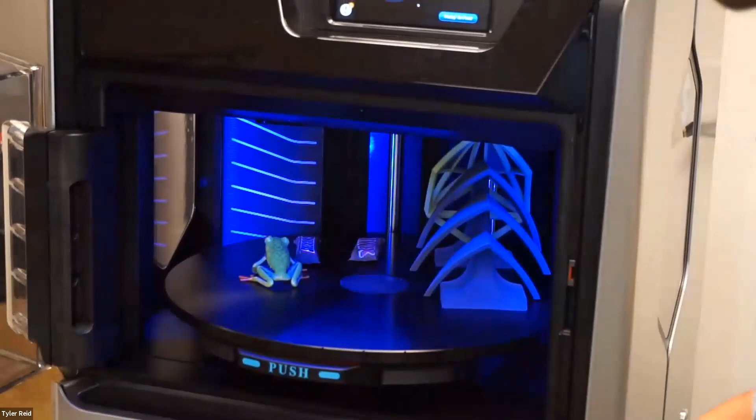So we open this up and you zoom in a little bit here. This is the process or the movement that's happening while the prints are happening. So we're printing in this sort of donut shape, and that donut moves down in Z. The print head sits up here at the top. That print head is not moving while printing is happening.

So we actually have much fewer moving components, and for all the engineers and designers here on this session, you guys know fewer components means less maintenance, less wear and tear, and less source of error. So we're getting prints of this system that are just, they're beautiful. They look like they're injection molded parts. You cannot see layer lines. You get these beautiful colors flowing into one another. And it all has to do with Stratasys' leap of faith that they could redesign how these systems are printing.

I'm going to show a little bit more show and tell. So I'm going to show a variety of parts. And I want you guys to be thinking about maybe some use cases for these parts. So I brought this part up because it displays just how intricate of a part you can create. The geometry doesn't matter. So just like a 2D photo, if you're going to be printing a cartoon that's 3 colors versus printing a beautiful portrait with millions of colors, the effort on your side is pretty much the same. Same goes for this. Throw as many colors as you want, throw whatever geometry you want at it, you hit print, you walk away, it comes back.

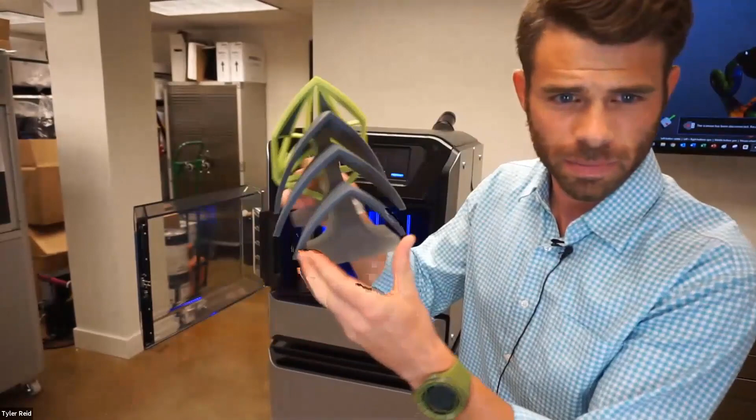This print here came off the J55. So this was an artistic piece that I really didn't want to be confined in my design to what is manufacturable. That's something that we're always up against. Now in the prototyping phase, you never want to have those chains on you. You want to be able to prototype whatever you want, exactly how you want to do it. And this is a perfect example of that.

If I had to take this to conventional manufacturing, it's going to be redesigned. I'm going to have to make concessions in what I want to achieve with my model. With printing, especially in the prototyping phase, I shouldn't have to go through those hurdles. It doesn't make any sense. It adds cost, it adds time, and we're all on a budget with both of those. And so your prototyping should be as easy as possible.

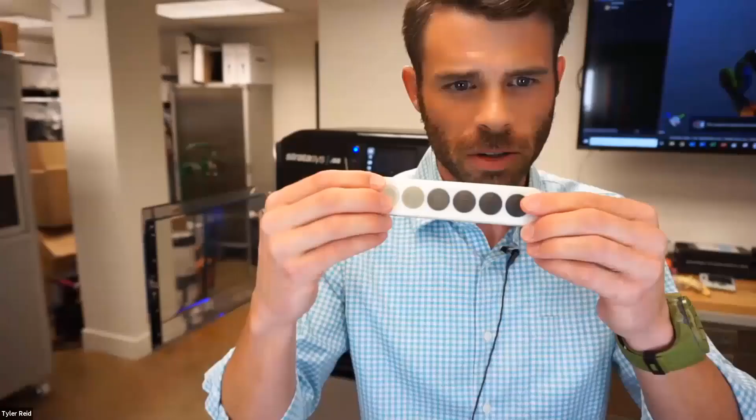Prototyping sometimes is single material. Sometimes it's multiple materials. Sometimes you don't even know what materials you're after. On these printers, in the PolyJet printer, we can do hard materials, we can do soft materials. We can mix them at different ratios to achieve whatever durometer or softness that we want.

Sometimes we don't know. So if we're prototyping and we have a series of buttons in our device, say it's a handheld device, we want to know for the market that we're intending, what's the right softness for the button? How do you do that? Conventional prototyping, you're going to have to cast all sorts of different levels of durometers. It's very time intensive. On a printer, you just set the durometer and you print as many as you want.

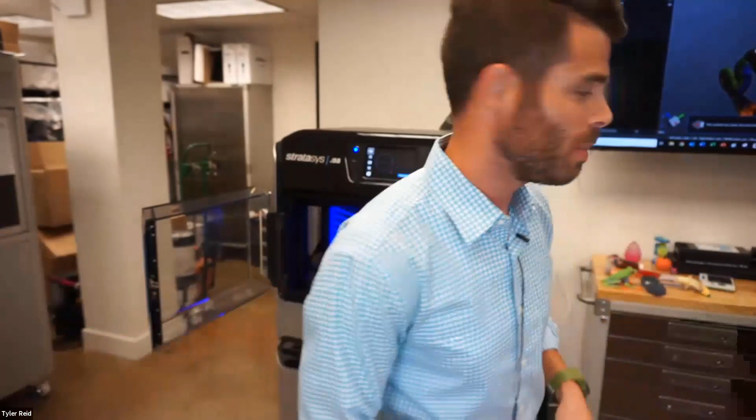Sometimes in the prototyping phase, we're trying to determine color, we're trying to determine material, and we're trying to determine finish. With these printers, we're able to replicate things like carbon fiber, wood grain, denim. I'm not designing a lot of things in a denim finish, but maybe some of you are. And we can print these high fidelity models.

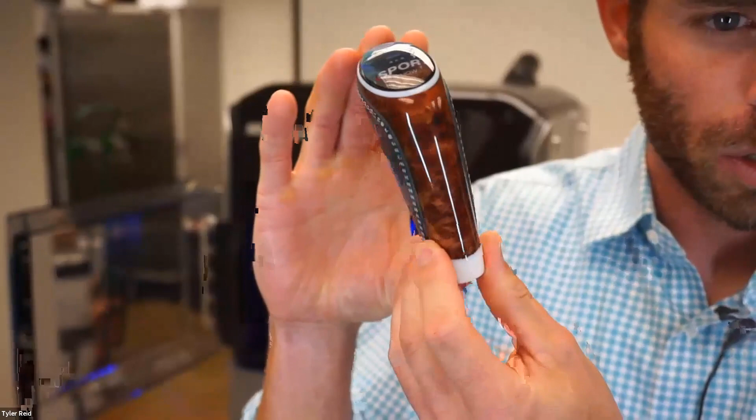So you get a model like this, and you bring that to a meeting with a C-level executive or a potential buyer, and you say, this is our design. It's been vetted. We've gone through many prototypes. We feel good about this. How do you feel about it? And the level of communication that you're going to have with a model like this in your hand is light years above a render or something made out of cardstock or paper or what have you. Conventional prototyping efforts.

Now think about items like packaging. Cosmetics and many, many other industries are all about packaging and color. Color is part of their brand. And if you don't have the right color, you're not representing the brand properly. The J55 and our other PolyJet color printers are all Pantone validated. So inside the software, if we're trying to target certain colors, we're speaking the language of color, Pantone. We have Pantones, we select them, and they come out exactly how we are envisioning.

This has some translucency to it. That's where that clear material comes into play. This, I guarantee, if I handed this to you, you would be so confused because once it touches your hand,

Cameron, we need to give Cameron some lessons on this camera.

Once you hold it in your hand, you're confused because from 2 feet away, your senses are telling you this is glass and this has nail polish in it. But once it's in your hand, it doesn't have the weight of glass. It doesn't have the feel of glass. It's all about the appearance, and it blows my mind every time.

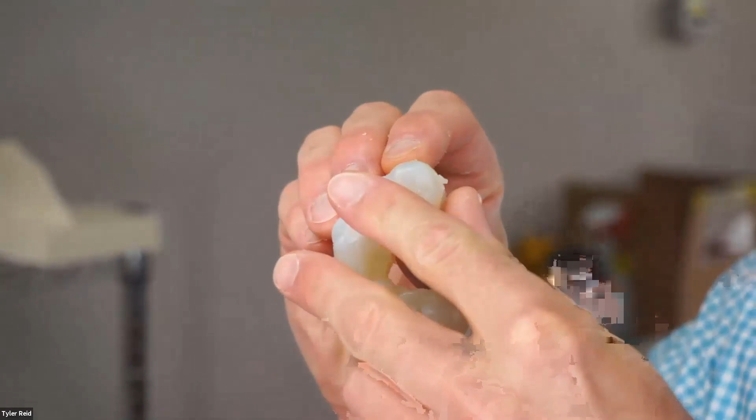By the way, if Tate was able to find a part with the support material on it, it's going to be really blown out here, but here we go. You can see it's just kind of waxy, and I can tear it off with my fingers. So once you remove the support, that's it. There's no other steps. You just got to get that support off either manually or just let it dissolve away. But there's no post curing. There's no soaking in a solvent and nothing like that.

Let's see. So following up on the glass question, can the J55 mix color and clear to create smooth, transparent glass? Well, it can create glass-like materials, and yes, it can tint those colors. So, you know, you have some base resins that actually have a little bit of transparency to them, and you have a perfectly clear. You mix them at almost infinite number of ratios, you're going to get transparent or tinted prints.

Loving these questions. And I'm so happy to see that so many of you stuck with us for the 90 minutes. This is something a little bit new for us. We love doing show and tell, and it's not very often we get to tag team and show all of our cards all at once. It's been kind of nice. Yeah, and we're actually 15 minutes under time. Cool. Very cool. Went through it really good. Just really quick and efficient. So thank you guys. Yep. Paula, Chris can help you with that question.